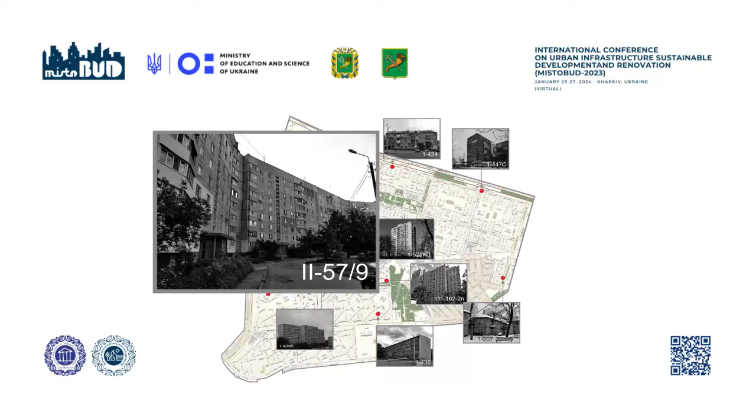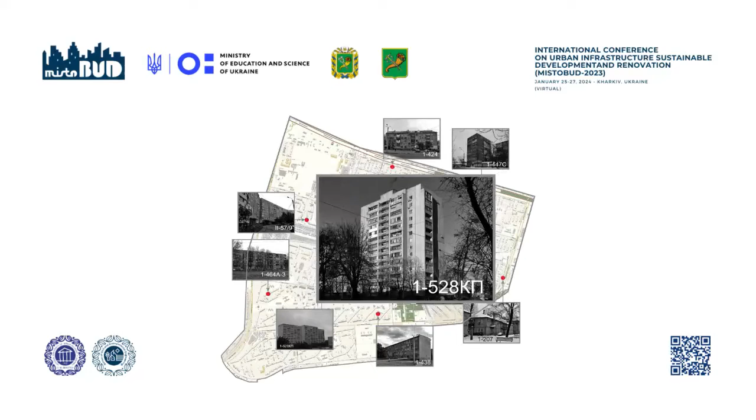The main problem is determining the optimal pace of social, environmental and economic changes in achieving a sustainable state for the city. Too rapid changes will inevitably lead to an aggravation of the socio-economic crisis. Slow changes will negatively impact the sustainability and ecology of the region.

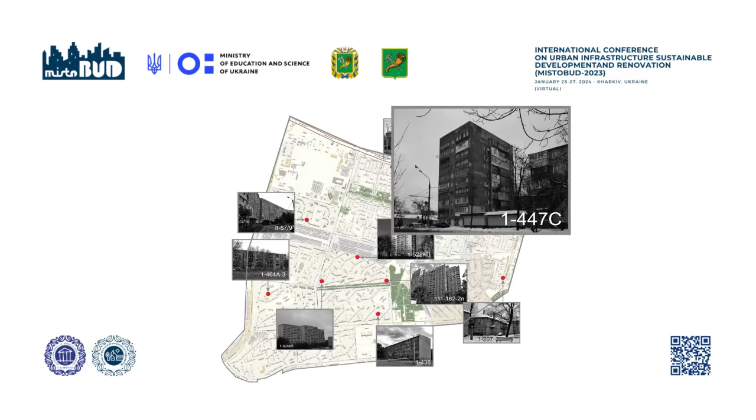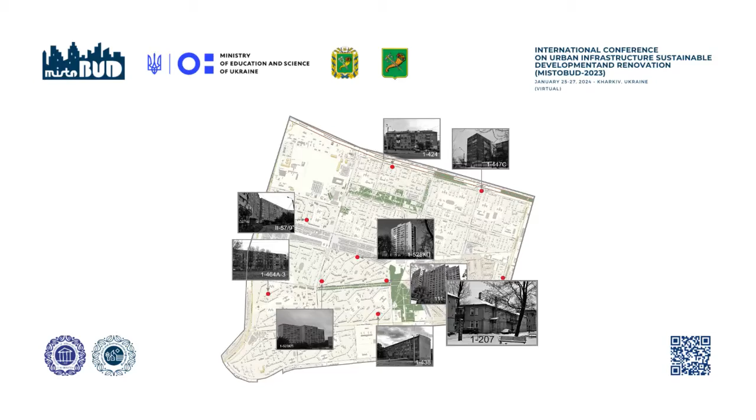For this reason, in this article, the authors have developed an innovative tool for the evaluation of the optimal value of the speed and acceleration of the modernization of buildings of the city based on the indicator of the ecological path of buildings and the indicator of sustainable availability of life goods for the population that limits the rate of change to a socio-economic acceptable level.

This research is a development of the scientific and technical direction program complex for modeling a city as a dynamic system. The research activity is an integral element of the large-scale scientific and technical direction program complex for modeling a city as a dynamic system, developed by the authors.

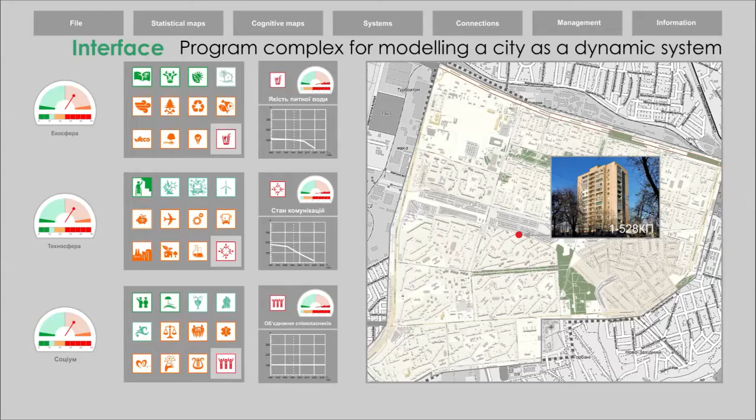The main goal is the development of a program package as information support for strategic decision-making processes to optimize the principles of city functioning. The program package analyzes the functioning of the city as a complex dynamic system.

It evaluates in real time the current state of the city as a system, the state of its subsystems and elements, and predicts changes in the dynamic processes of their functioning.

This program package is based on a combination of two trends in modern science: optimization of city functioning processes and management of large amounts of data about the city, big data.

The program package simulates the positive and negative dynamics of the transition of a city, its subsystems and individual elements in the situation of stability, crises and possible pre- and post-catastrophe states.

The methodological basis for the development of the software package is the vision of the city as a dynamic system in which the totality and mutual influence of all processes determine the parameters of its functioning. The resistance to changes, their speed and acceleration form certain requirements for the organization of the city as a system.

The urgency and complexity of the measures that must be taken to resolve this crisis pose additional threats. Poverty and low social activity of the population will block most of the programs being developed.

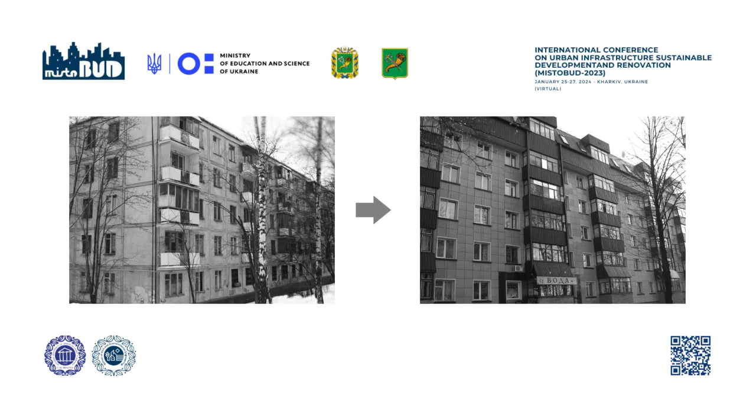This conclusion is based on numerous attempts by local governments in large cities across the country to implement experimental projects to solve the problem of obsolete housing.

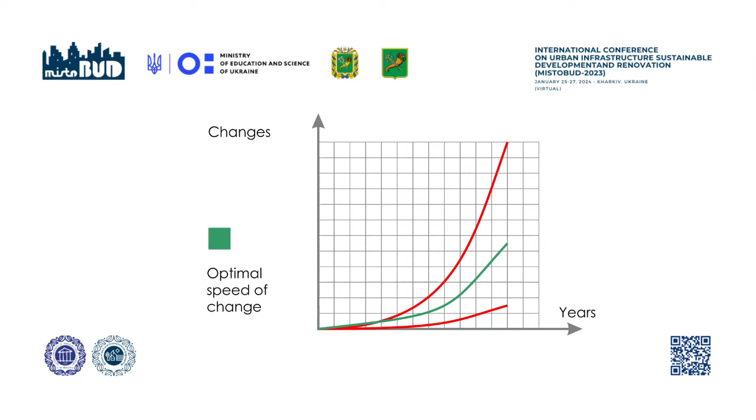Based on the above information, we have focused the research activity on the development of an innovative tool for regulating the speed and acceleration of the transformation and regeneration of the architectural component of cities in order to achieve social, economic and environmental sustainability. The research activity aims at the evaluation of the vectors of change, namely speed and acceleration

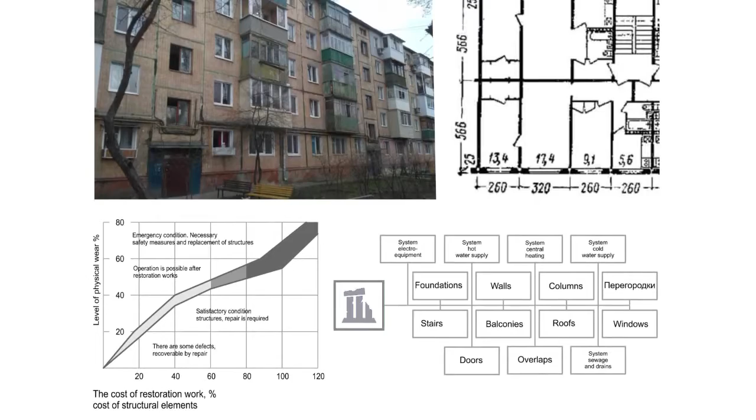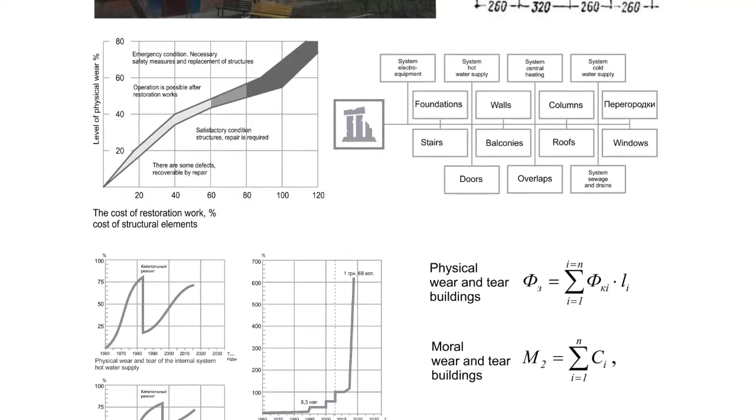by means of the indicator of the ecological footprint of building, a composite indicator consisting of the ratio of many indicators combined into three main groups: resource consumption, pollution production and biocapacity of adjacent territories.

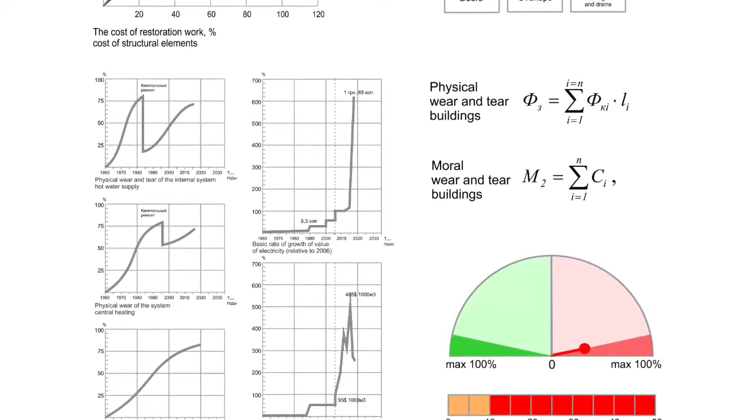Thus, the main indicator of positive changes is the excess of the region's biocapacity indicators over the consequences of resource consumption and pollution production. Moreover, according to a holistic vision of sustainability, the limit of speed and acceleration should be

set by the indicator, sustainable availability of life goods for the population. This indicator is also a composite indicator, consisting of the availability of goods that satisfy a minimum but sufficient continuum of physical and spiritual needs of the population.

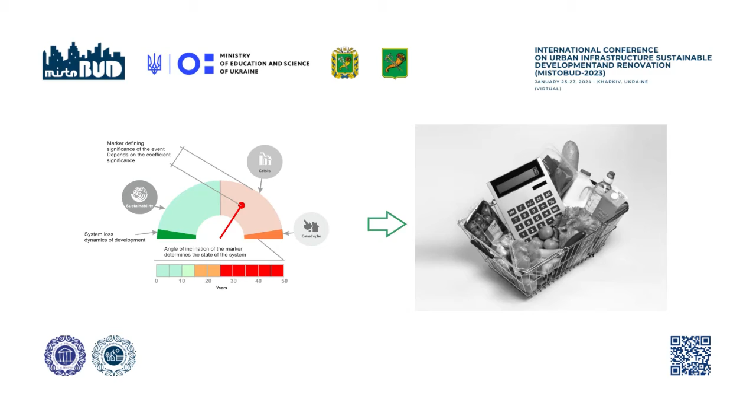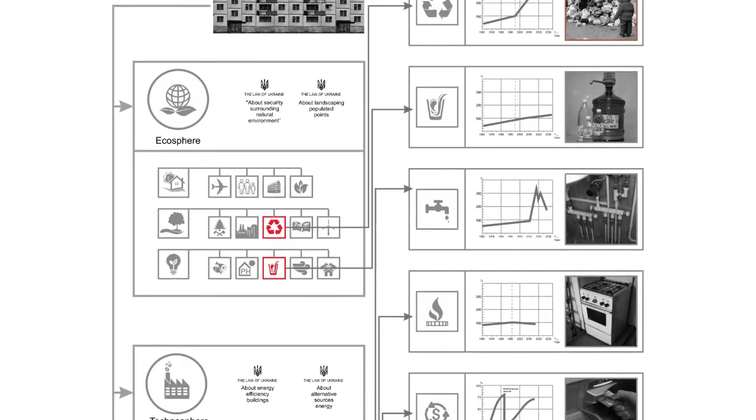In accordance with the purpose of the study at the macro level, the vector, speed and acceleration of positive transformations of the architectural component of cities are set by the indicator of the ecological footprint of building.

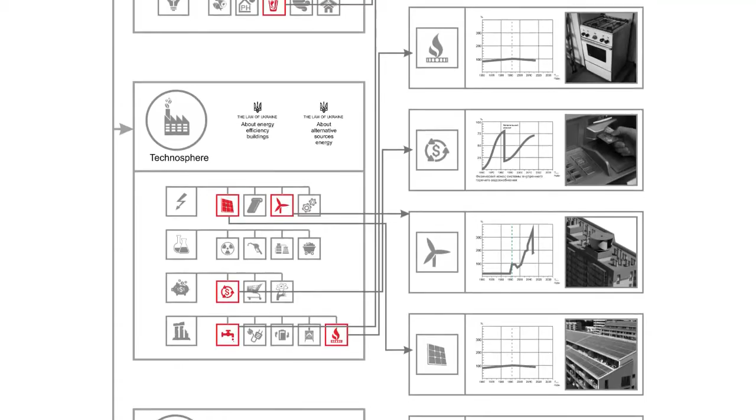We have developed a morphological tree representing the structure of the ecological footprint of a building. Currently, work is underway to create a tabular template for the standard building. The template considers the dynamic processes of functioning of the social, technogenic and environmental components of the building, their statistical data, and the mutual influence between themselves and other elements of the city.

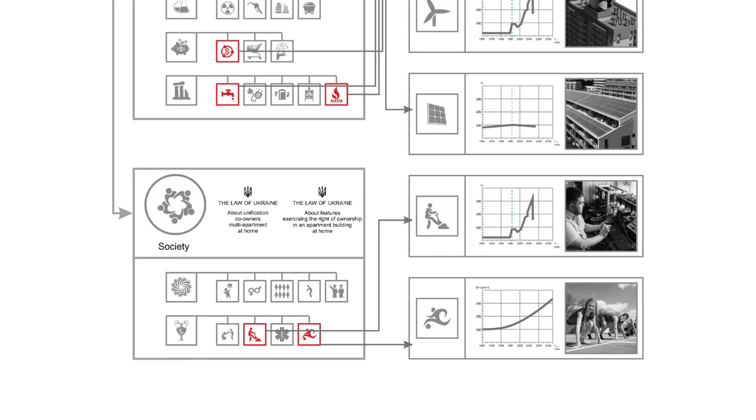At the current stage of research, we are solving problems associated with combining methods of system dynamics, statistics, information logistics, and content analysis. The expected result of the group's work should be a mathematically and logically designed software module, as an integral part of the program package for modeling a city as a dynamic system, which allows you to automatically take into account the negative and positive impact of an architectural object on the ecology of the region.

Several factors are taken into account. Life cycle of the building: the influence of a building on the ecology of the region at all stages of its existence, from the design stage to disposal, circular economy.

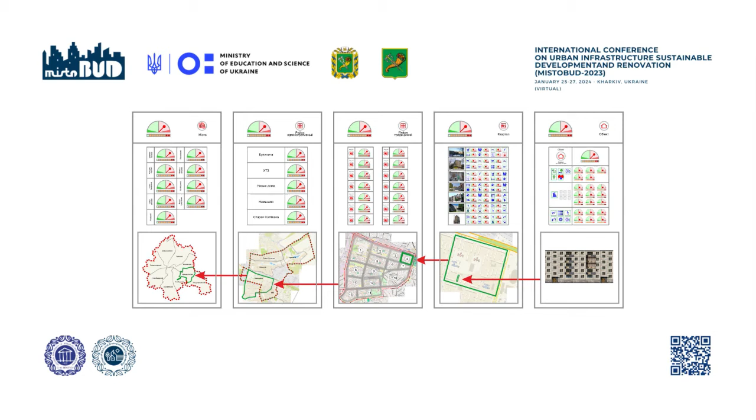Data scaling: the indicator is a composite indicator made up of many indicators. To analyze the principles of the functioning of a building and its pressure on the environment, we need the ability to obtain indicators of the ecological footprint at all hierarchical levels, from the building to its utilities, structure, resource consumption and individual elements. At this stage of the research, we have developed almost the entire algorithm for scaling and data output.

Social behavior of the population: the sum of the personal environmental contributions of each community member becomes a very visible direction for the sustainable development of the city. Here a large complex of factors should be taken into account: ethical consumption, environmental thinking, resource conservation, personal contributions to sustainable development, etc.

In turn, each of these factors is revealed into a complex of behavioral reactions of a lower order. Together, the above factors determine the direction of the vector of changes, achieving environmental positivity in the architectural component of the city. Sustainable development goals, laws and building codes set the pace of change.

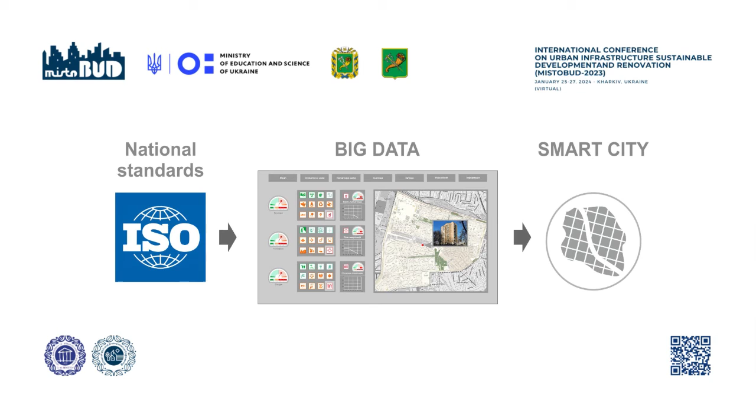We have developed an interface for an indicator displaying the existing state of the building and the predicted transitions of the principles of its functioning from stability to crisis and possible disaster. This interface is described in detail in our article.

The status indicator of an element, object, or system is made in the form of a semicircle divided vertically into two equal halves. The light green left half indicates that the system is in a stable state. The light red right half shows that the system is in a state of crisis.

The indicator is equipped with a moving arrow, the angle of which indicates whether the system is experiencing a stable or crisis state. The distance from the arrow tip to the outer edge of the indicator semicircle indicates the significance of the event. The transition of the arrow to the green or red zone indicates that the displayed element, object, or system has entered conditions of stagnation or a pre-catastrophe state.

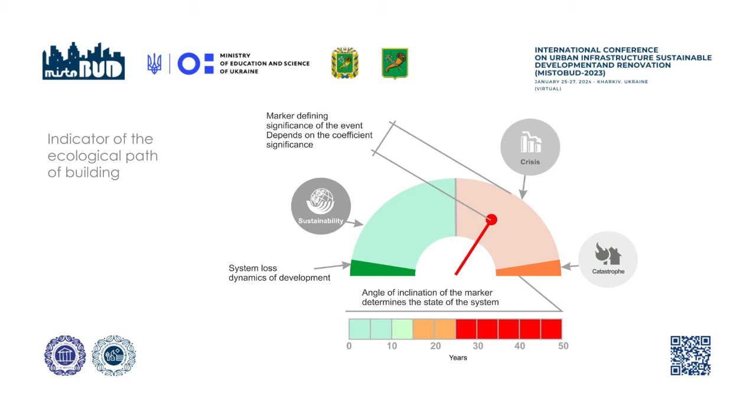At the bottom of the indicator there is a scale that gives a forecast of possible transitions of the system from stability to pre-catastrophic states, from the current moment to the prediction horizon, usually 50 years.

As a result of the practical implementation of the developed software module, which takes into account the ecological footprint of architecture as an integral part of the program complex for modeling the city as a dynamic system, we will be able to identify agents of change. Working title.

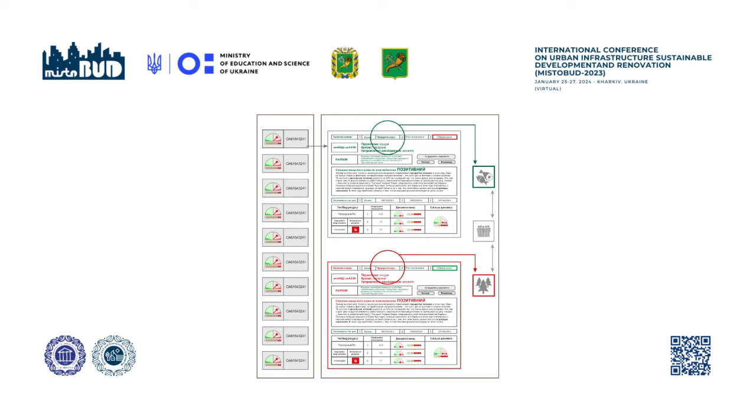Agents of change are those elements and dynamic processes of the functioning of a city as a system, the change of which, with minimal expenditure of resources, natural, man-made or social, gives the maximum positive response. As a result of identifying such elements, we are able to formulate, on their basis, step-by-step strategies for the modernization of architectural objects with minimal resource consumption and maximum socio-economic and environmental effects.

In assessing the effectiveness of the use of agents of change, a special role is played by the indicator of sustainable availability of life goods for the population. In conditions of severe limitation of available resources, this indicator will allow building a hierarchical sequence of agents of change, based on the availability of planned changes for homeowners. Thus, it becomes possible to carry out modernization while avoiding acute social conflicts.